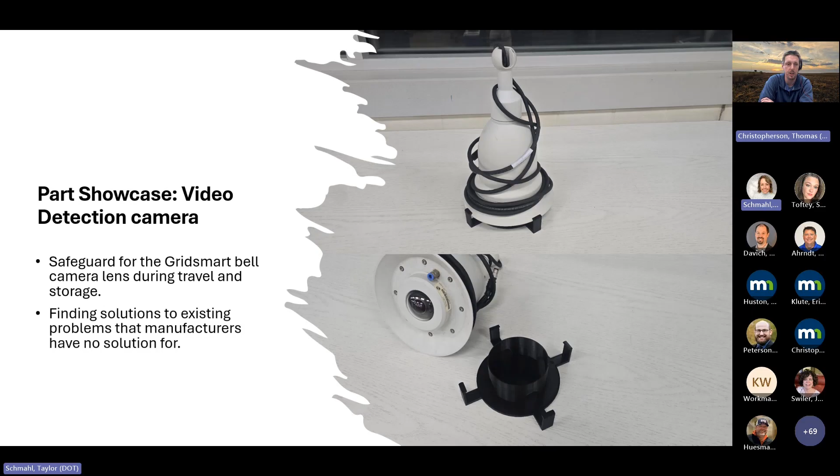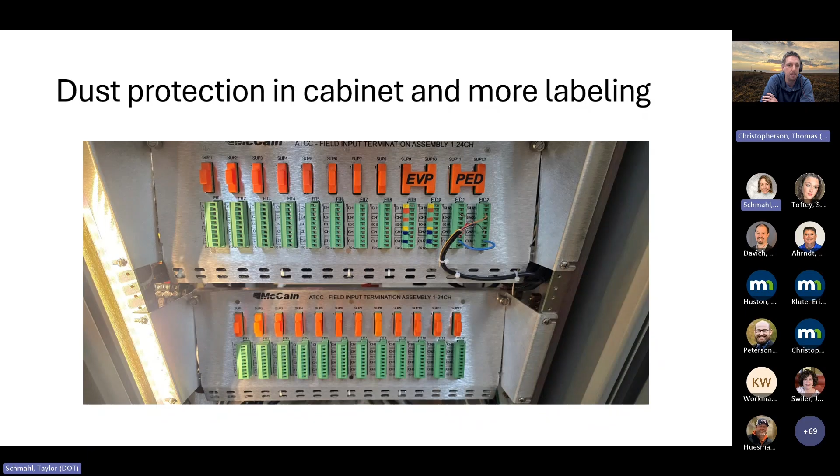Next slide. Kind of explaining the same thing - this is on the backside of those traffic management cabinets. I wanted to develop these as well; they're dust protectors for slots that are not used on the back of the cabinet. It prevents dust and debris from getting into those slots, and again we have more labeling in there for easy troubleshooting.

On the next slide, these blocks are reflecting back on the previous slide. It was a little fun project I wanted to do, because we paint those colors on these terminal blocks to help us land them.

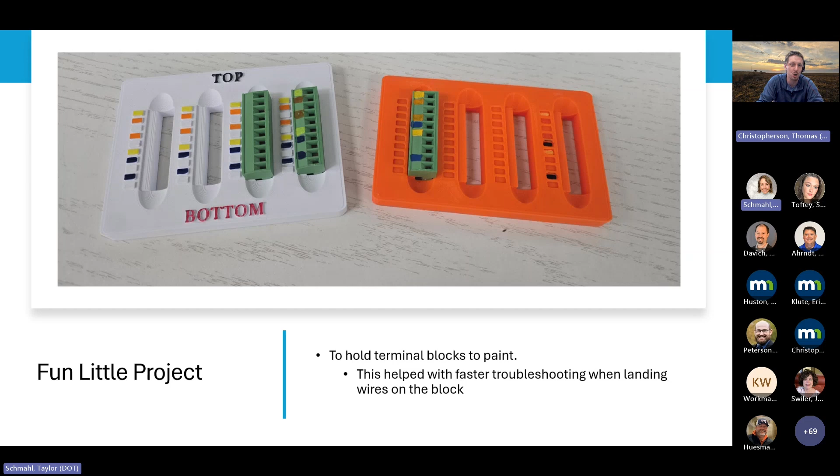They're called EVP wires, basically wiring for inside the cabinet. So I wanted to build a little template that would allow us to have color coding for easier troubleshooting. So they just slip right in and then you're able to paint the colors on there. So that pretty much concludes all of that.

Like I said, the 3D printer is for, we've purchased it for something that would help us develop stuff that a manufacturer doesn't have.

The department that we mostly worked with was the CAV department on this. So I'd love to give them a special thanks for partnering with us on purchasing the 3D printer so we can make these parts.

So that's all I pretty much have for all of that. I guess we can open it up to questions. Everyone's muted? I see a raised hand. Yes, I don't know how I'm going to answer that.

Let's just pop over to chat. How many different parts have I printed? Right now, I'd say about 5 or 6 different parts.

We are partnering with the U of M as well. So they're developing parts, and we do have other departments in Minnesota that are coming to us. That was a whole goal of the 3D printer itself, to partner with other people, so if they had something, we could print it off, or they could print it off too. The U of M is mostly using it for prototyping inside the plow trucks.

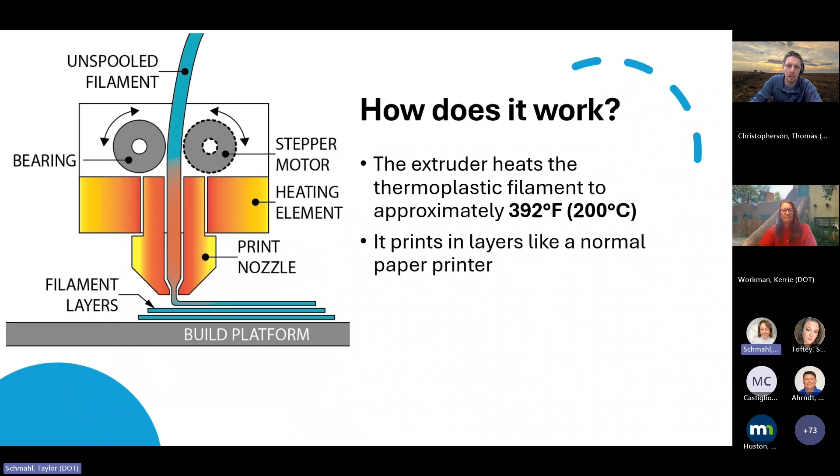Do you have the ability to go back on those slideshows? Yeah, Taylor, yes, can you jump back a few slides? Can you go back to the introduction? Sure, yeah. This one? Yeah, there we go. So it might be kind of hard to see for some users in there.

So the 3D printer itself has 5 heads on there, and each one of those heads has a preloaded filament, as you can see in those little boxes on both sides of the printer. Each one of those boxes has a different color filament or a different type of plastic, and that gets fed up into the actual 3D printer itself. The printer is smart enough to know that when it's time for a color change, it'll park the initial head first, then go pick up the other head, pull that out, and start extruding that color or different material onto the print. That was the biggest reason why we picked this printer, the efficiency of that. There are other printers out there capable of doing it, but there's a lot of waste involved, and time.

As of right now, this is the fastest one on the market for it. There are other ones in the making right now that are substantially faster and do a better job, but at the time of purchase, this was the number one.

So hopefully that helps explain that. Yeah, thank you. Great question.

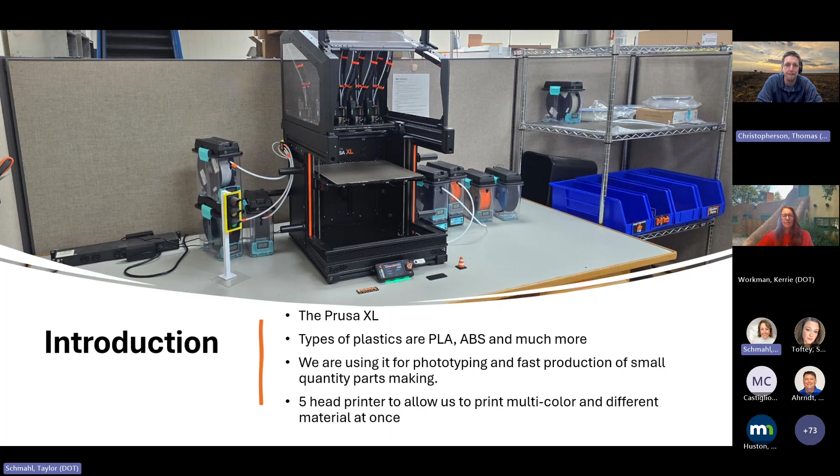And one more, two-parter: how did you design the parts, and what software did you use? Starting with the software, the 3D printer itself has software that helps convert the part that I developed, or anybody developed, into machine code. That software is called Prusa. As for the software for 3D designing, I personally use Tinkercad, but I know MnDOT and a couple other guys here were working on a piece of software, because what we want to do is future-proof this machine, so if somebody else wants to develop a part, we want an easy-to-learn software that can fast produce parts. We're still working on the official software for MnDOT, but we are licensed and approved for the Prusa Slicer software for this printer.

And when you have a moment, Tom, there's one more question that if you could respond in the chat about a good website to learn more about 3D printers, that would be appreciated. Yep, I will take care of that as we're going through. I do see a few on here, so I'll answer those. Perfect, thanks so much.

All right, and that was our Spark Award winner, certainly a fantastic idea that has a lot of interest, and I'm sure we'll be hearing more about that innovation. Our next award category was the Upgrade Award, which was designed to honor ingenuity, adoption, adaptation, and resourceful problem solving using the resources we already have available.

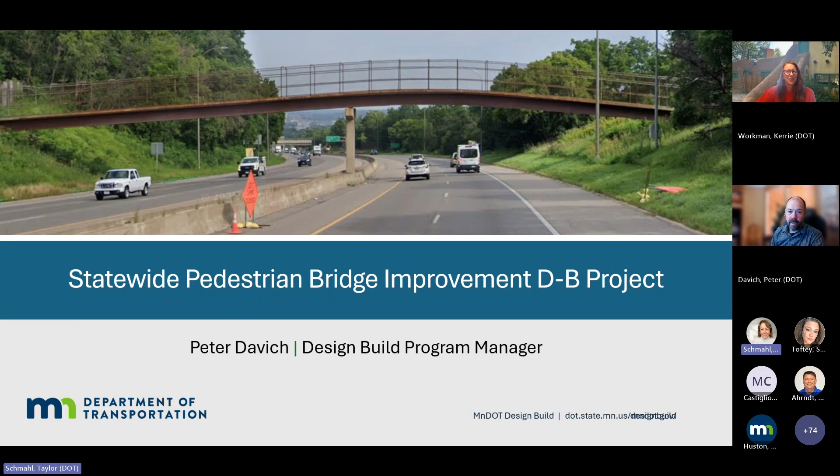And today you're going to hear a project called Project Bundling, Pedestrian Bridges in Multiple Districts. We have Peter Davich here from the Office of Construction and Innovative Contracting to share more about this innovation. We'll again stick with the format of letting the presenter share his slides and then opening it up for questions. Welcome, Peter. Thanks for that intro, I'll try to go through here in a few minutes.

Design build is something that's been around for a while, and we're not really on the innovation list for it, but for the Upgrade Award, this is a use of design build we have not used in specifically this way before. Just for the introduction one more time, I am Peter Davich, the design build program manager at MnDOT, and I've held that role for 13 years now. In any case, we have a statewide pedestrian bridge improvement design build project here.

The issues we were looking at, really at the leadership high level before this project came together, were that we have a statewide inventory of pedestrian bridges. Many of them actually have ADA non-compliances, which isn't good for a pedestrian-specific facility. Some of them have structural needs. But we have trouble getting pedestrian bridges in particular into the usual program. Usually they wait for a roadway project to come along and then get tacked onto the side. A project specifically focused on ped bridges is quite rare.

In this particular case, there happened to be, luckily, some carbon reduction funds that the department was given. It's a relatively new funding group, and it didn't have a specific idea for exactly how it would be spent when the funds were allocated, except that they needed to be used to work on modes of transportation that were not adding carbon and would ultimately reduce carbon usage in the long run. Another issue, as everybody's aware, is that there are generally staffing shortages in the districts and across the department, and everybody's stretched to the brim with projects already.

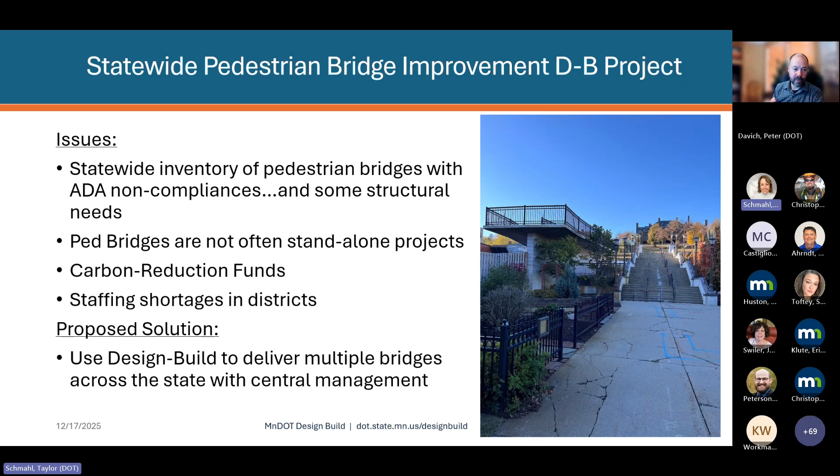We looked at 20 plus bridges around the state. This was Tony Lesh working in the bridge office at this point. They were looking most specifically at ADA, and also whether the structural needs of the bridge would really make it worthwhile to address that one in particular. They were looking for projects that would have relatively minimal permitting and other complexities to make sure these could be bundled together without complicated permitting efforts.

The idea was to allow the contractors to work over these bridges whenever it was convenient for them, over a 3-year period. With the same logic, we wanted no right-of-way. I put asterisks on those because those are kind of the project joke. Of course, moving forward, this is supposed to be simple. It wasn't supposed to have right-of-way. In reality, as with every MnDOT project, there were complexities and there being some right-of-way, but that was the idea.

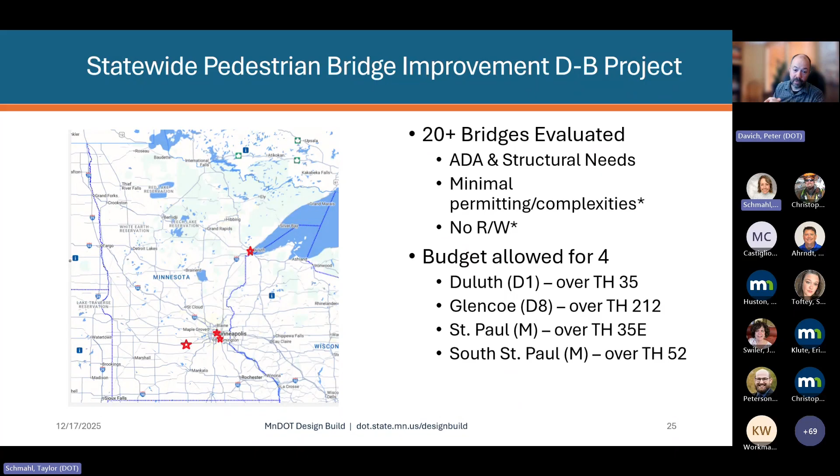The budget ultimately allowed for 4 bridges: a major pedestrian bridge near the Twin Ports interchange in Duluth, one in Glencoe in District 8, and two in the Metro District in St. Paul and South St. Paul over 35E and 52.

So I can say the benefits and what's different. I mentioned these: it's a statewide scope, it was run centrally, we minimized the district involvement. Obviously they need involvement to know what we're doing, and we need to keep coordinating with them, but we tried to minimize the resources they would need to spend on it. This was a newer attempt to pair ADA and design build, and we tried some different models for doing that. Ultimately, we let the project to Ames as the contractor with Alliant as their consultants for $13 million, which was relatively near our engineer's estimate, so we were pleased with that.

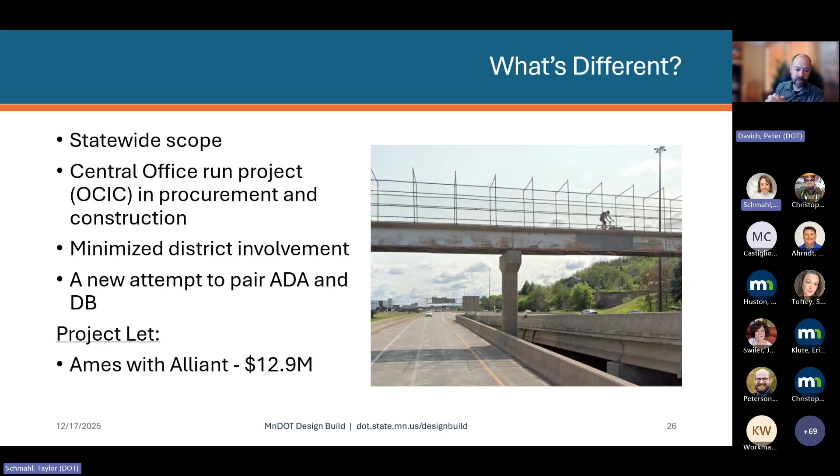A few lessons learned along the way. There were, of course, permitting and some right-of-way issues that popped up. Most specifically for permitting, the contract was written for a single location, but again it's a statewide contract with permits being in different locations. It wasn't that it was not possible, it was just kind of awkward at times to explain how this is one project in different locations, in the environmental process in particular. Possible, we figured out how that would work, but a couple speed bumps.

And both centrally and for the district, I think both groups would say, if we're running it centrally, but we're needing to stay on the radar of district functional groups, whether it's right-of-way or utilities or what have you, there's not kind of the natural coordination if you're sitting there doing it in person. So there needs to be good structures to make sure everybody's aware of who's doing what, and we're on the priority list for all of them. Again, nothing that would stop us from using the method, just some lessons learned. The idea was to balance it so we weren't being burdensome.

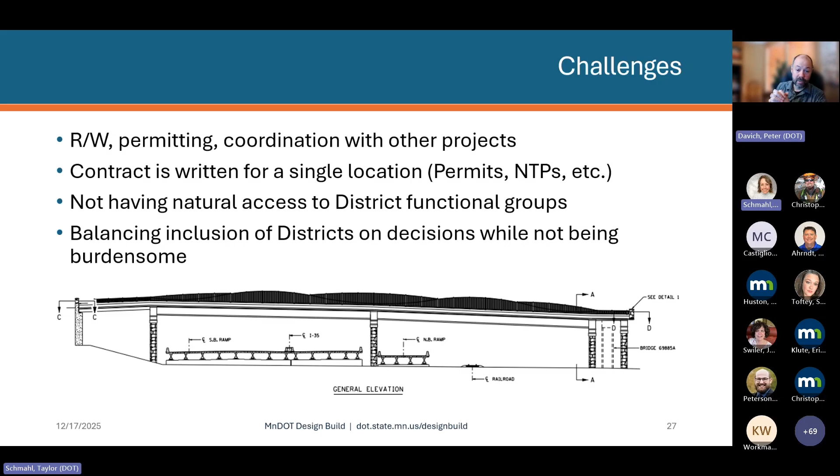And last slide, I think. I should mention, I meant to say this from the start: I was involved with this project as it was kicking off and we were selecting bridges and procuring the contractor. Luke Johannek has really been the person running this project ever since and learning these lessons for us. He wrote most of this presentation for me, so I would be negligent if I didn't mention his name here.

In any case, should it be done again? Was it a good innovation? I would say yes, I think this is a good model to use. If we have these awkward work types that don't fit easily into other projects, especially if they're in need of specific contractors that have specialties and can use that specialty in different locations, maybe ITS, maybe landslides, maybe culverts, maybe bridges again.

It does help address district resources, kind of bundle things together. And if you have a question, you can contact the alternative delivery group to see if something fits. I think that's all I had.

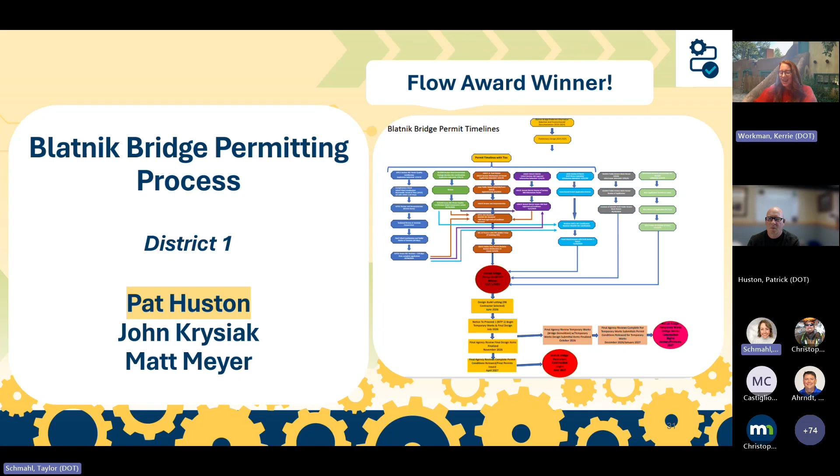And yes, going to hand it over to Pat. All right, thanks. I'm Pat Huston from District 1. I'm our MnDOT district lead for the Blatnik project, which is a really big one, $1.8 billion that we're doing with Wisconsin. So it's a big team project.

Next, please. I want to make clear this was not my idea. So really, from the idea point of view, it's John Krysiak, our project manager, and Matt Meyer, our District 1 environmental coordinator, who came up with this idea. And you'll hear me talk about collaboration and communication, and you might say, why is that innovative, Pat? And it's not, but the way we implemented it was. Also a special shout out to Keith Malnow, who was a key collaborator through the process. So I'm just here to share the story.

So the problem we were trying to solve is at a $1.8 billion project, inflation is $80 million a year. So obviously every year we can shave off the schedule, that's $80 million. We also need a lot of permits, 14 to be exact. So how can we best work together to educate and collaborate as we go? We don't have time to back up. Our motto is kind of no surprises for anybody.

And I think I saw Lynn Klarkowski on here a couple projects ago, kind of in the same context. When I hadn't engaged Lynn's unit yet, because I didn't think it was time, she told me, if you don't tell them, they just make it up, right? So I'll explain that more later.

Some of our challenges were accelerated project delivery. We're obviously trying to do this as fast as we can to save money. Peter talked about design build, and he's leading us on that, but design build really adds complexity to permitting. Typically when we work with permitting agencies, we have some sort of plan to look at and go over things, whereas with design build, you don't have as much up front. Also, in that effort to collaborate, we have issues to address like temporary works, like how's the contractor going to get out to do demolition and construction, bridge demolition, that sort of thing. So we really need to collaborate heavily with the agencies with not as much information.

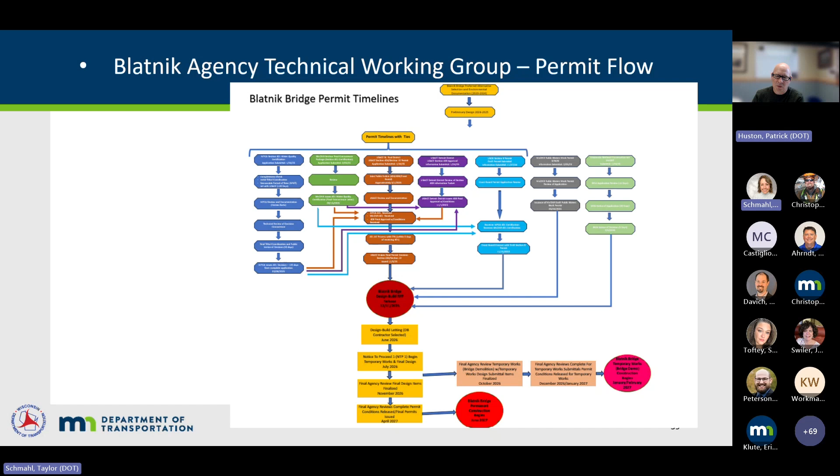I know you can't see this, and normally I would pop out a PDF if I was presenting, but this is kind of the flow across the top, all the different permits, or most of the major ones. The arrows represent how they depend on each other, and what you can't see there is our date and flows, which we put into P6, our scheduling software.

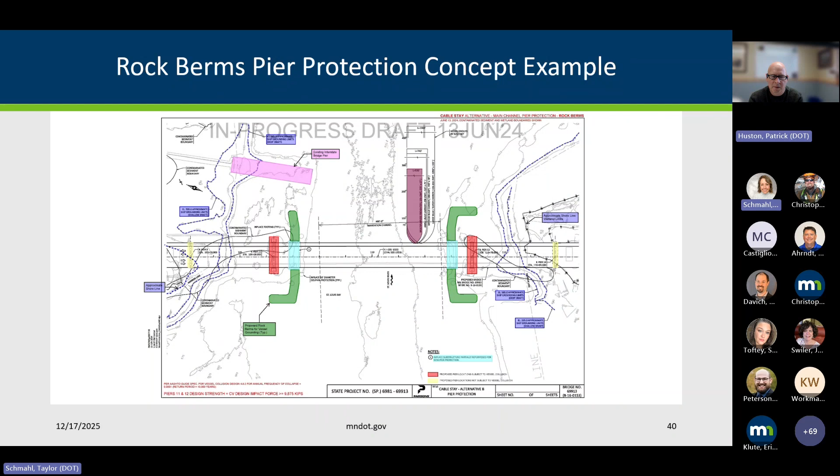This is one example just to illustrate what the benefit of this was. You're looking at a top view, or plan view, of the Blatnik main span across the St. Louis River. Those green vertical lines were our first concept at pier protection to help prevent ships from hitting the piers. Basically think of them like islands. We thought that would be good without putting in more man-made structures. There were some advantages.

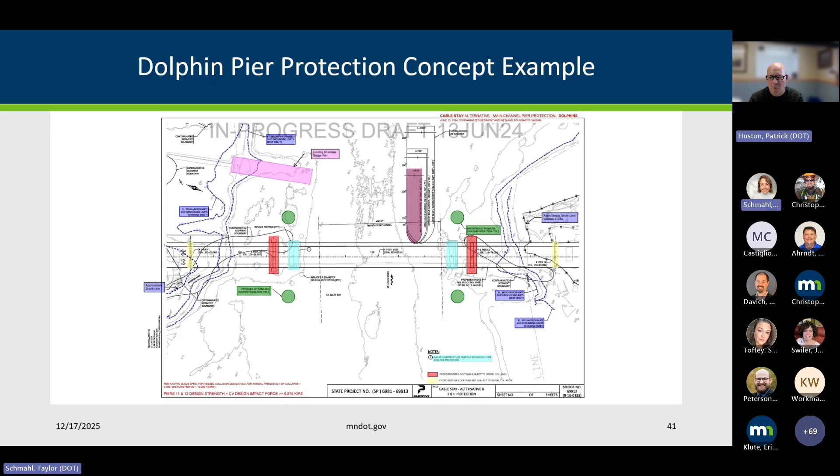Just one small snippet, I'm not going to read all this, but what we heard from the agencies—this is just some of the Wisconsin DNR feedback, but we heard it from the Corps and the Coast Guard and others—was that they wanted to limit the amount of fill in the river. We don't want to lose habitat, don't want to restrict the stream, don't want to degrade water quality, etc. They also didn't want terns to nest on those structures, since there's a protected tern in the area, and if they nest on it, it makes it harder for us to do maintenance. We also wanted to minimize disturbance on potential contaminated sediment.

So if we would have done it the old way and worked with one agency at a time, we'd have probably gotten too far down this path, hit a snag, and lost schedule.

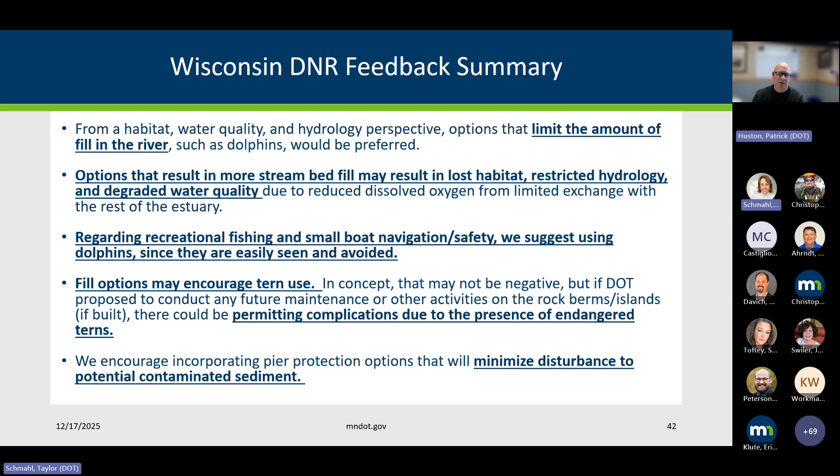Thank you so much, Pat. I feel like each of our presentations could be a webinar, an Innovation Hour webinar on its own. Definitely, yeah, learned a lot through that. Thank you, about coordinating with DOTs across states, across agencies. So much good information. Questions? Any specific questions?

Did you, or maybe the project management team, know of anything like this previously, or was the idea just to redesign what had been done and try something to hopefully create more efficiency, which you have? It was just knowing that we had a really tight deadline.

Good afternoon, everyone. This is Ethan Peterson with the Minnesota Department of Transportation. I am the state pavement marking and crashworthy engineer. I'm here today to present on the study Pavement Markings Wet Retroreflectivity Standards. This study was sponsored by the Local Road Research Board and the Minnesota Department of Transportation, and conducted by the Texas A&M Transportation Institute.

The goal of the study is to provide a pavement marking that can be seen in wet nighttime conditions, which continues to work toward the MnDOT goal of providing an appropriate pavement marking on all highways 365 days per year, as set forth in the MnDOT provisions for pavement marking operations tech memo. An appropriate pavement marking is one that meets or exceeds the standards defined in the MnMUTCD. During winter weather events, pavement marking should provide presence after pavement is clear of snow and ice.

It helps to also look at the possible benefits that could be achieved through the use of wet retroreflective pavement markings. The study, safety evaluation of wet reflective markings, found that a 14% reduction in wet road crashes was observed on freeways, and a 25% reduction was observed on multi-lane roadways, as seen depicted in the graphs on the slide.

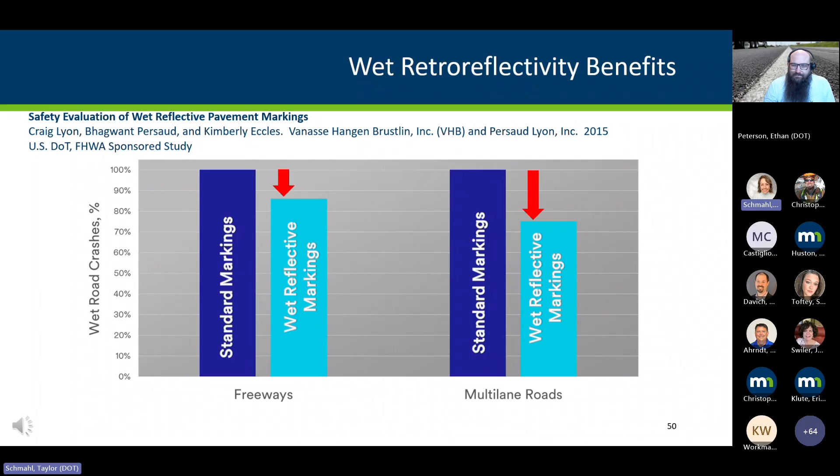Now we look at the inner workings of the Pavement Markings Wet Retroreflectivity Standards study, the test procedure. First was the wet conditions testing. The participant was driven up to the beginning of the rain tunnel and, from a stationary position, counted the amount of skip markings that were visible to them. This was set up in the MUTCD standard 10-foot marking, 30-foot gap.

From the number of visible skips, the observation distance could then be calculated. After the enumeration of the skips, the participant was then asked to give a 1 to 5 subjective rating of the pavement markings observed. As seen in the picture here, 2 pavement markings with varying wet retroreflectivity were observed on each lap through the rain tunnel. There were also 2 different rainfall rates applied in this study, 1.5 inches per hour and 2.5 inches per hour, both of which are considered high rates of rainfall.

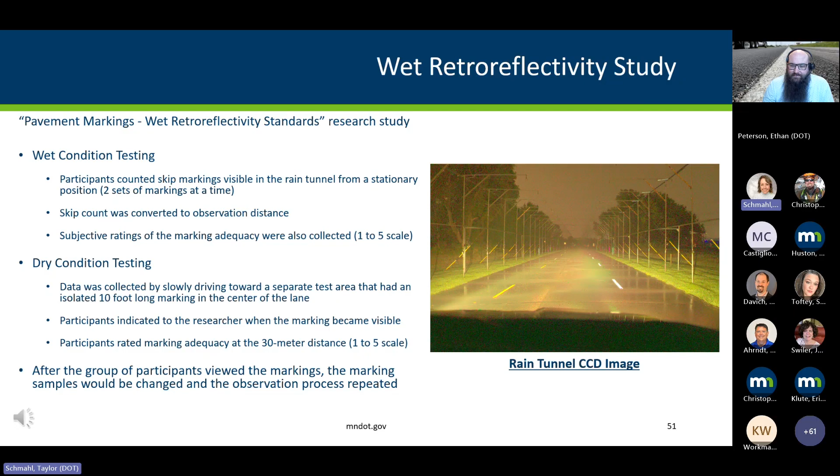The second phase of the lap through the closed course was a dry conditions test. The 2015 Ford Explorer approached an isolated skip at roughly 10 miles per hour, until the participant indicated that they could spot the pavement marking. Then this distance was recorded. The participant was then driven to a distance of 30 meters out and asked to subjectively rate this marking as well. After this, the lap was completed, and the markings would be changed for the next lap.

This slide shows the dry condition phase of the testing, with a larger picture showing the participants' maximum detection distance and the inset picture showing the 30-meter distance that was used for the pavement marking subjective rating.

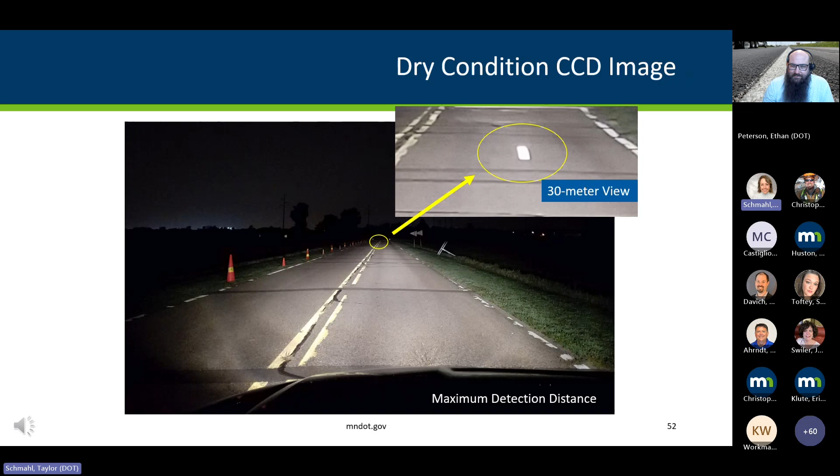To really hone in on what wet retroreflectivity levels should become the new standard, 1,209 human factors observations were recorded. Of those observations, 403 were in dry conditions, 162 were at a rain rate of 2.5 inches per hour, and 644 observations were at 1.5 inches per hour.

This consisted of 20 marking samples, 11 of which were white and 9 were yellow. The dry retroreflectivity of each sample ranged from 35 to 1250 millicandela per meter squared per lux, and the continuous wet retroreflectivity ranged from 21 to 480 millicandela per meter squared per lux.

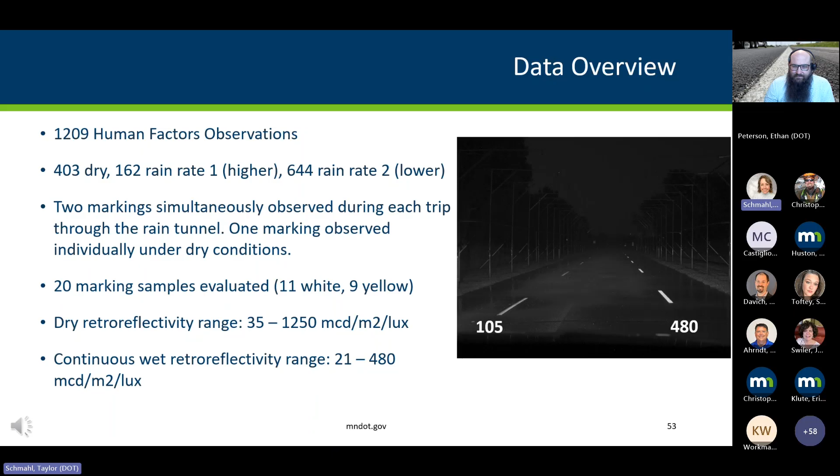Another important aspect of this research project was capturing the right demographic of the driving population. The 43 participants' average age was 58.5 years old. Older drivers need brighter markings for the same level of visibility compared to younger drivers, which is why the participant demographic was skewed toward older drivers.

As a quick refresher, a Snellen visual acuity of 20/20 indicates normal vision at 20 feet. So 20/40 indicates that the observer would need to be 20 feet away from an object that people normally see from 40 feet. Looking at the visual acuity of the participants, we see 28 are below the average eyesight. This is also helpful in setting a standard that will cover the majority of the driving public.

Now that we've covered the why and how the research was completed, we can move on to what was discovered through this research study. The main takeaway was that a continuous wet retroreflectivity level of 50 millicandela per meter squared per lux was adequate to meet the average needs of participants in the study on roadways with speeds of 60 miles per hour or less.

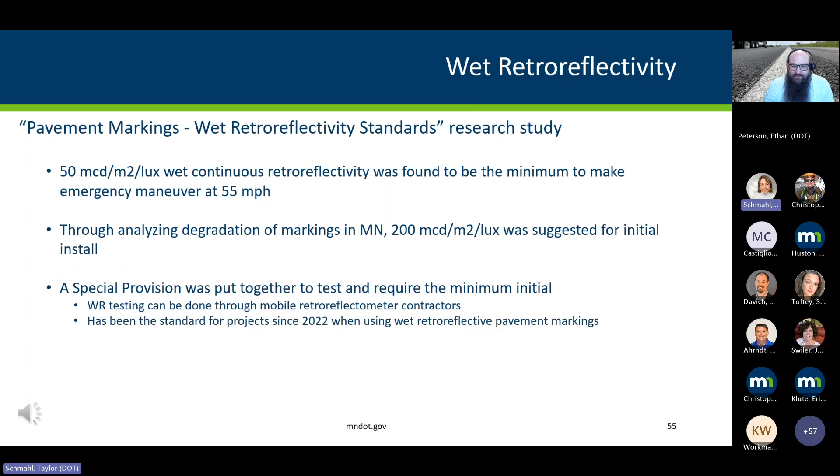I'll probably just jump in here. Yeah, I just wanted to say thank you to everybody. Sorry about that, that was really fun to awkwardly watch myself narrate a slideshow.

Thanks everybody, and also thank you to the group that really helped push for these wet retros. It's really been something we've been building on for a couple iterations of pavement marking engineers before me. Definitely wanted to say thank you to Mitch Bartelt, Michelle Moser, and Ken Johnson for everything they've done up until this point. I really think pavement markings have benefited huge from everything we've done, and even especially this. So we keep on improving, and it's been great.

Yes, thank you, definitely a huge safety innovation. Questions about what Ethan shared?

One thing I'll add quick is that when we went through this, we had a good feel for what dry retros meant. So we could take wet retro readings, but we didn't quite know what they meant, because we're seeing how well you can see them at night in dark conditions, whereas with dry retro you can kind of tell with your eyes, but it's not completely the same. So the two are on different scales.

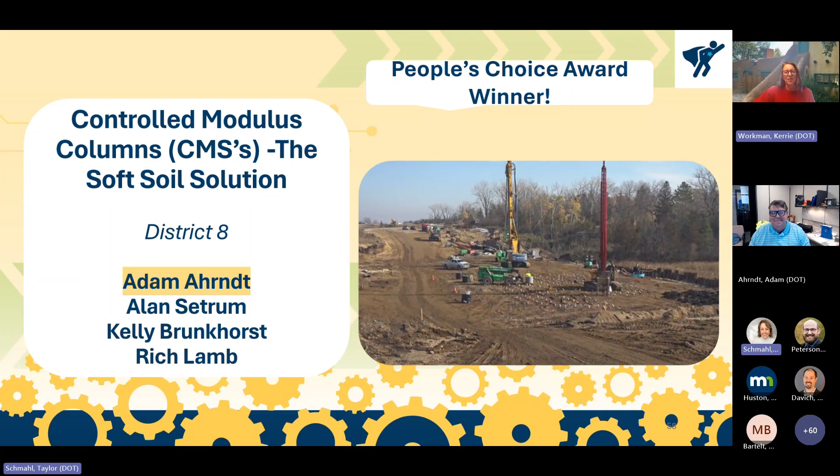Well, thank you very much, very glad to be here. I see Kelly Brunkhorst, our district engineer, is also online, she was also part of the team. Good afternoon, my role here in District 8 is I'm the resident construction engineer out of the Willmar office. So as the title implied, this is the soft soil solution. Most everyone knows you can't build a good road on soft, squishy soil.

So that was kind of the problem we were solving. It was wood piles, and we swapped wood piles out, which were in the plan. This is all done during the construction phase with concrete inclusions or controlled modulus columns.

Something that applies to all of the innovations listed today is, what are you overcoming here? I was raised up in the project management world, at least in my early years, where with the triple constraints, as big issues pop up, you get to choose two. You don't get all three. If something pops up, you can choose time and cost, but your quality may suffer. If you choose to hold cost and quality steady, your time may suffer. But through the magic and synergy of innovations, and this one especially, we're very impressed, because it took less time, it cost less money, and the quality was about the same or better. So once again, we feel like this one was a really big winner.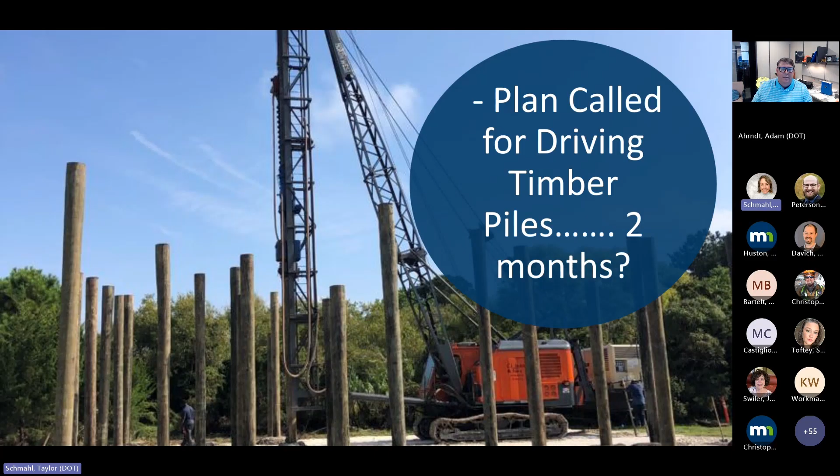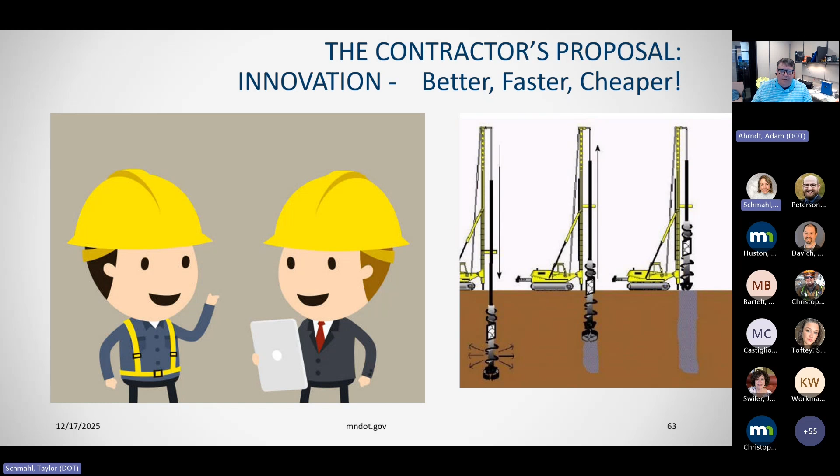A subcontractor actually approached the prime contractor and said, look, we do ag structures, things like beet piles, potato piles, giant grain bins, but we've been branching out into the road construction area. And we didn't know it at the time, but this was actually the third time MnDOT has successfully attempted that. I don't know the stories of the other two areas. I know one is Twin Ports Interchange, and I know the other project, the first I believe was 9 Mile Creek. So we teamed up with our expert, Rich Lamb, and he was instrumental in helping us listen, understand, and go through the numbers to really understand the contractor's proposal.

Next slide, please. It's just some simple mechanics. It's a drill bit with a flap gate on the end. They go down to that hard pan or bedrock, whatever's available, just like a bridge. They drill into that 3 feet, 4, sometimes 5 feet to get a nice solid foundation. And as that drill bit is pulled up, they have all kinds of hydraulic gauges, like 5, 6 different ones. Concrete grout is injected in there. So instead of a wood pile, you get a nice concrete pile as that is pulled up.

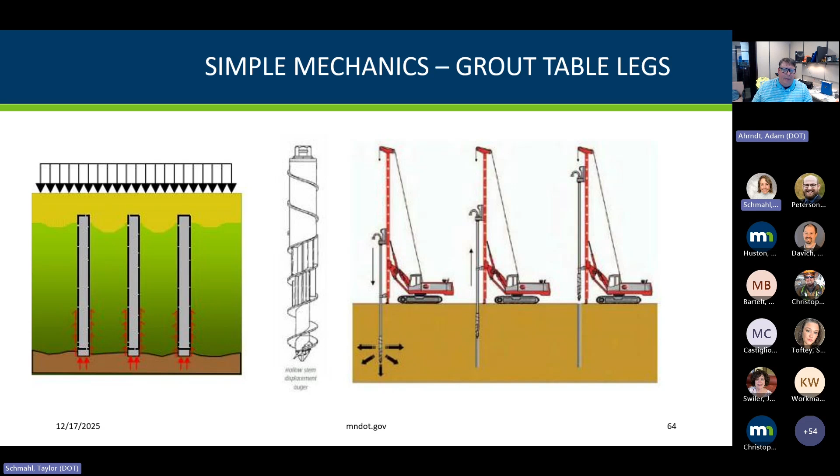Now our soil was extremely soft, and like I said, up to 50 feet deep of peat. And so when they put that down, they really didn't even have to drill. It was a matter of a minute or two, they were done with each column. So it probably went faster than they even planned in the first place. I mean, it just sunk right in. They drilled a little bit down at the bottom to get into that hard pan and bedrock, and then they went on to the next pile. It was a very fast process. It was fun to watch.

And worldwide, they've only done about 2,500 of these, primarily in ag-based or building-based type uses.

Full kudos to the team and to the prime for listening to this subcontractor trying to branch out.

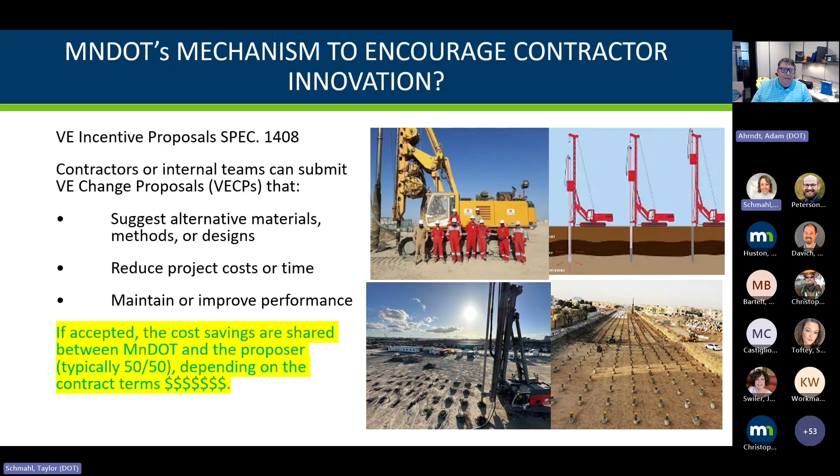One of the things that really helped us during construction, not to be confused with the value engineering process that happens during program delivery and sometimes pre-design where they look at hypothetical numbers, Spec 1408 allows swapping of something. If you can show MnDOT that it's better, faster, cheaper, we can take a look at it and they can get the appropriate monetary award for that.

So here's right out of their proposal. Here's our original bid cost, as bid during construction here, 3.3 million. Here's the revised cost dealing with controlled modulus columns, 1.9 million. For District 8 MnDOT, our savings was $1.45 million.

Of course, there's a back change where that's the spec, what spec 1408 is talking about, to really encourage the private sector and get them to collaborate with MnDOT and other subcontractors. In this case, they do get a 50% back payment on that. But of course, they had to save the 1.45 million, improve it, and stand by it in the first place before they got that payment. So win-win for us, win-win for the prime, and win-win for the subcontractor.

It was very efficient to install these 723 in all, which was slightly less than the wood pilings, which was slightly over 1,000. Once you get in there and put these, the load bearing platform sinks into that structure. You add a little more geotextile on top, and then the settling stops.

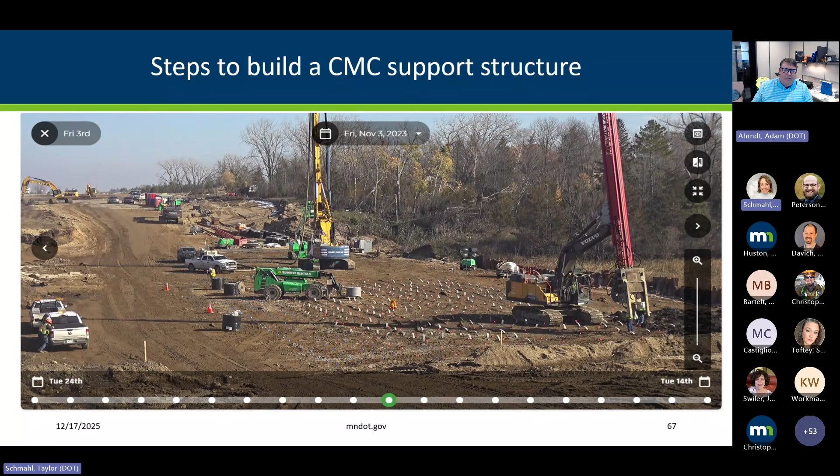But out here, as you could see, we could drive around and get the big equipment out there, but it's actually in a condition of settling until you get those controlled modulus columns installed.

Next slide, please. So what was all the controls? As I mentioned before, there's several hydraulic meters on here, and that's really what this company was known for. It actually started as a testing device company.

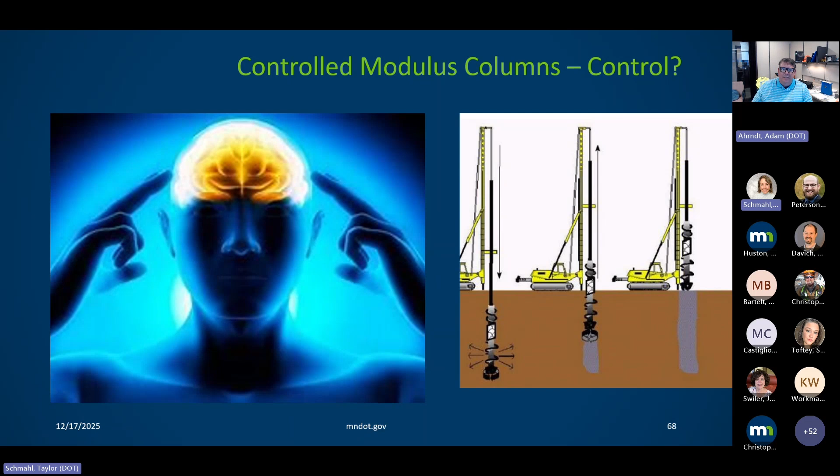Next slide, please. For each and every column put out there, we get this data sheet. This represents one column, you can see up there number 607. And all this data here, we can bring back to our road and materials, or our foundations unit, and of course they say, yep, it's all good.

One else, kind of an innovation spinning off into another innovation. District 8 is big in digital construction inspection. So also every column out there, we GPSed, so if we ever do have any problems out there, we'll know right where it's at. It's all in the construction file.

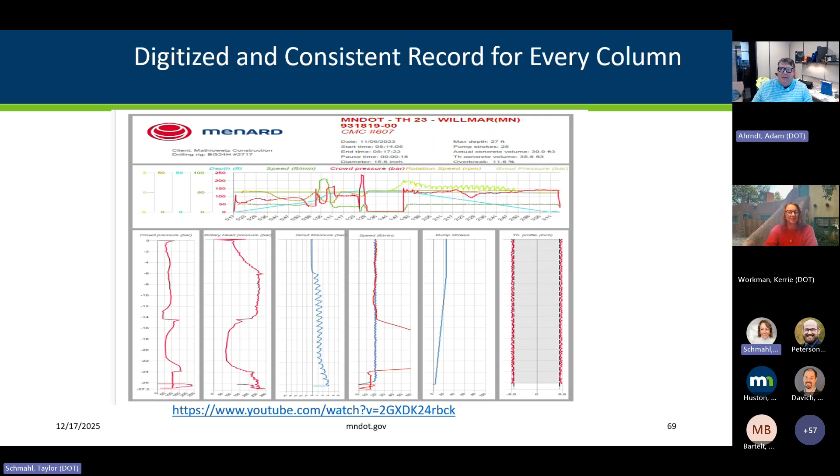And like I said, each one of these data sheets goes with one column. So we ended up with 723 of these. I think that's all I had, unless Kelly wanted to add additional comments or statements, but we can open it up for questions. Thank you.

I just want to thank you and the team, Adam, for implementing this and taking it to implementation. It was a fun one. Everyone listened and we all learned a lot. Thanks for being on our team. For those of you who don't know, Kelly was our ADE of construction back then, obviously now our district engineer. So thank you, Kelly, for being on the team as well.

All right, thank you both. And Adam, we do have some questions in the chat. The first, I'm going to just read it: when are wick drains a feasible option for dewatering mucky soils?

I don't know the answer to that. I would defer that to Rich Lamb. There was drains also installed, I think that's what you're referring to, the wick drains. I think that was done more as a bonus than anything in this case, because the product we really bought off on were the controlled modulus columns.

I know the idea behind them is to get rid of that original high pressure water that may be latently holding in the subsoil there. I've heard they work well. We have them out there, but they were done as kind of an ad hoc onto this, so Rich Lamb may be able to answer more.